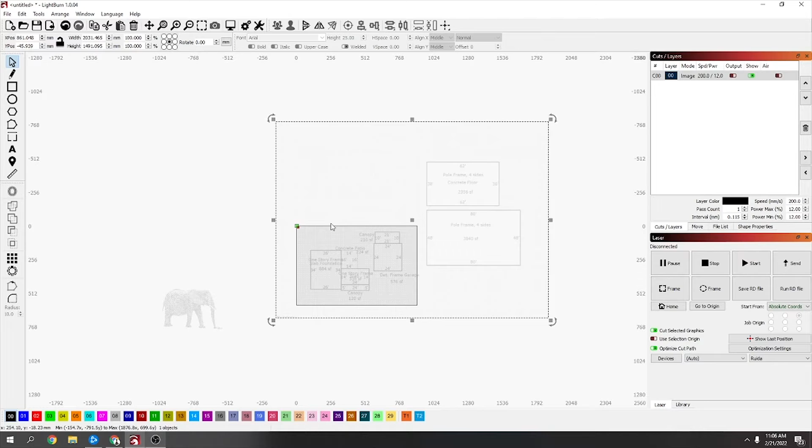First, what I did was go to the auditor's website, and they had a sketch on there of the property which had the sizes and everything, so I could just go straight off of that.

First thing I'm gonna do is, this is 26 feet, I've got to pick my scale for what I want it to be. I went with a 1/24th scale, and if you find a scale converter like this one, just type in the real length and it'll tell you the scale length there is 13 inches.

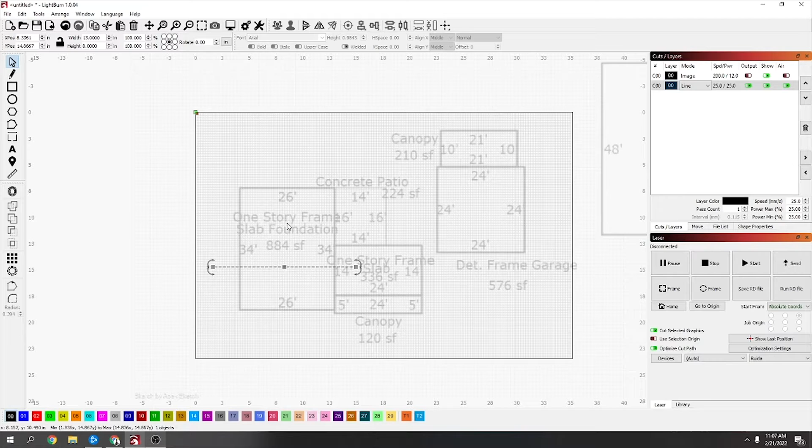I'll go back there, draw out a line, hold shift while you do it so it draws straight, right click so it disconnects, and then up the top go to the selection tool and select it. Up the top, make it 13 inches, so you know that's the scale for the 1/24. So now this 26 feet needs to be that wide to be in the correct scale.

So I'm just going to grab this picture, scale it up until that fits within the walls there. Yeah, that looks pretty close there, so I'm going to leave that at that.

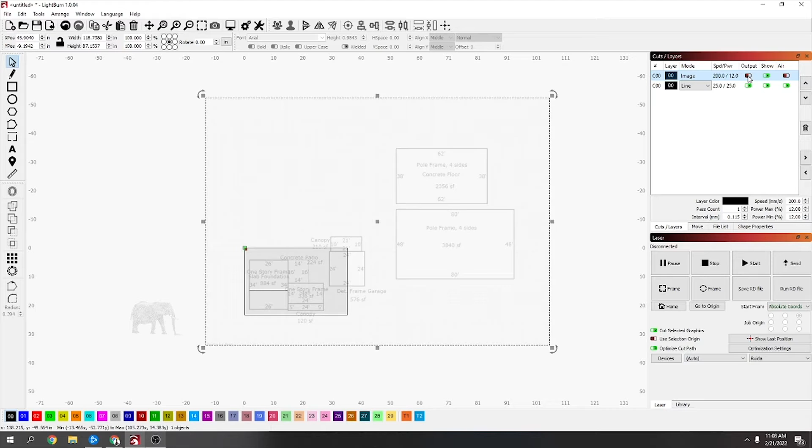You can, with this output, turn off output and it will still give you an outline, but it won't block everything. Sometimes it's hard to see. Alright, so we don't need that line anymore because you've got the scale now.

All you've got to do really now is follow around. The only place, because what I'm going to do is I'm going to make slots for it to stand up in.

So what I'll do is draw a square here. I'm going to draw one here, because this other part is a canopy, so I'm just going to do it to here for a second. I'm going to connect these two together just by shift and click, so now they're both connected, and then down here take everything out of the centre, so now we've got that shape.

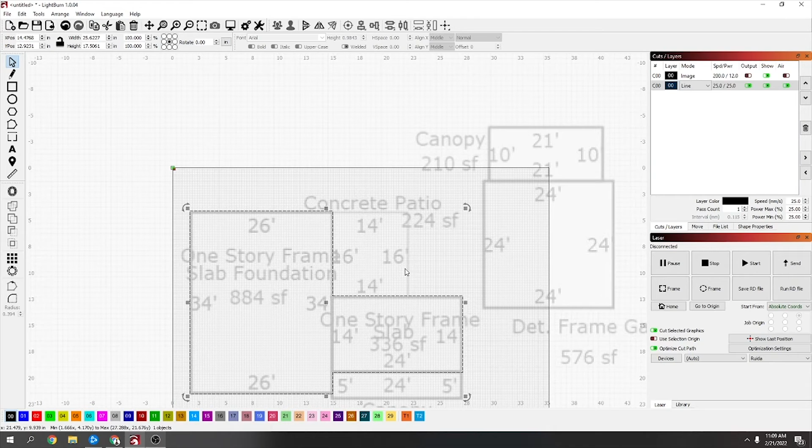This is a concrete slab, and this is actually in the wrong place, but I think I'll just stick with the actual house. So now you've got this line.

The foam I'm using, the foam core, is around 3mm thick, so what I'm going to do is put an offset. Oh, I've got to change that to millimeters first. I'm not sure what that is in inches, so in millimeters offset I'm going to change it to 3mm. It could be 4 actually, because that was already on there. I'll leave it at 4.

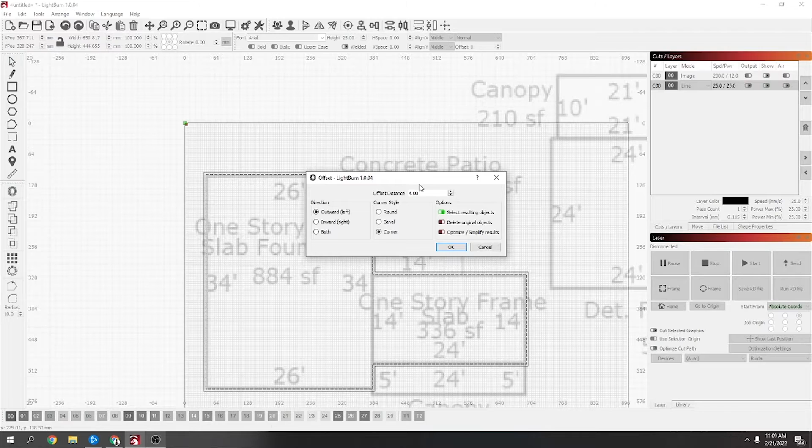I could always scale it down a little bit. So now we've got all this would be cut out. I don't quite want that. I've got to put where my doors are, and it's not actually on this map.

I know roughly, there's two 6-foot patio doors here, so this is going to be 3 inches in that scale. So I'll go back to inches, make the width 3 inches, and really it just wants to be a bit wider. There may be an easier way of doing this, but this was the way that I've found.

Now if you come to this node tool and click on these lines and just press T, it will cut it back, so that's the opening for the 6-foot door. So now I could take this, flip it 90 degrees. I've got to close them ends off as well afterwards, and the other patio door is around here.

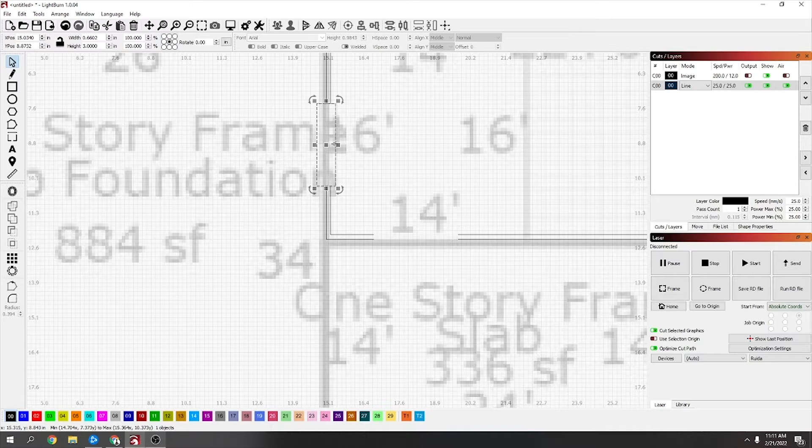So I'm just going to do the same again, node editing tool, T, click that one, T, delete that for a second, and now just with this pen tool I'm going to draw in these ends, just connect them again.

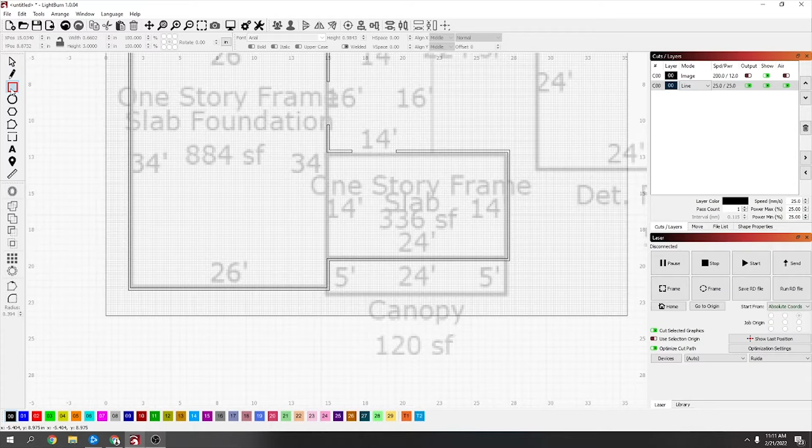Okay, the front door, which is 36 inches. So you can just change this to inches, change this to 36, and that will tell you that would be 1.5 inches. So just draw out another square, make it 1.5 inches.

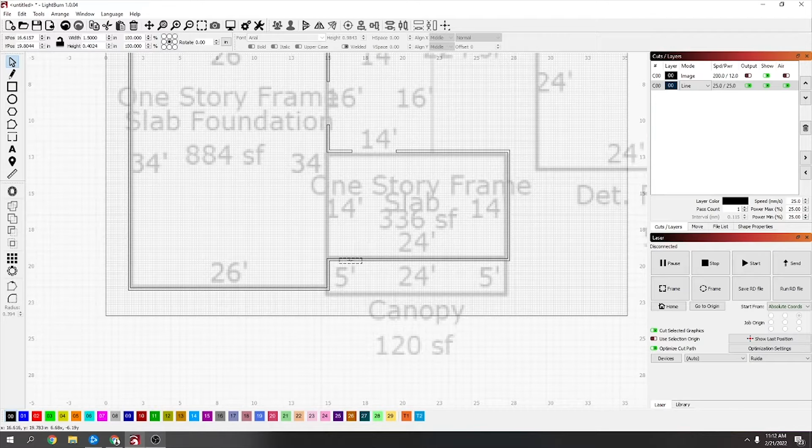And where the front door's going, for me, is around about here. Just do the same thing, cut it out, and basically that's the idea, just go around and cut out your doorways.

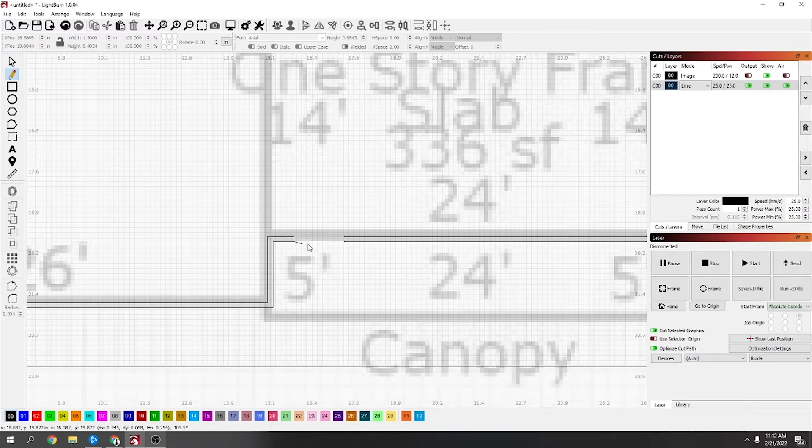You don't want the big chunks to fall out, so really you want some kind of doorway or something so it doesn't just completely break off, because the windows are going to be cut within the wall, so these openings are only where doors are going to be. But I think that's all the doors on mine. I do actually, this building is connected here, but I'm going to leave that one out for now.

Okay, so the next thing is to know the height of the ceiling, because that's how tall your walls are going to be. For me, that's 8 feet. So let me just quickly put this back to inches, which would be 4 inches.

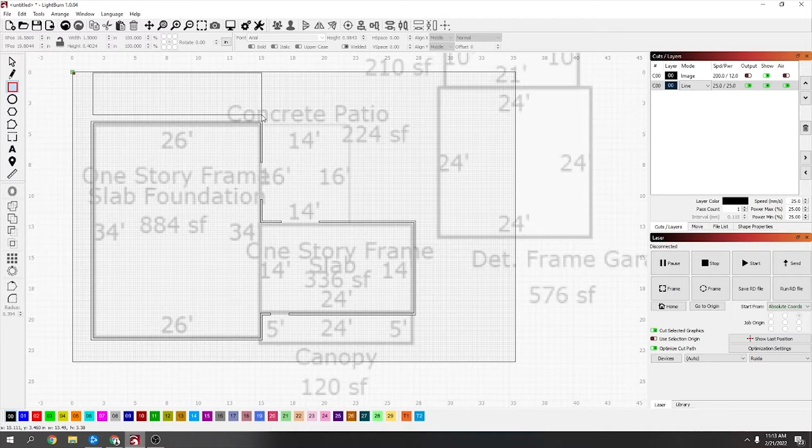So back to the LightBurn. Let me just go back. I'm going to start right, it should start the box from this corner.

Okay, so that one should be 4 inches tall. Oh, but it's slotting into the bottom, so actually it's got to be a little bit extra. In millimeters, if I add the thickness of that, which is 4 millimeters, so I'll say plus 4.

So now it's added 4 more millimeters to that, which is 105. What is that in inches? 4.1575. But now, actually, now we've got one wall, you can just duplicate this really and flip it around.

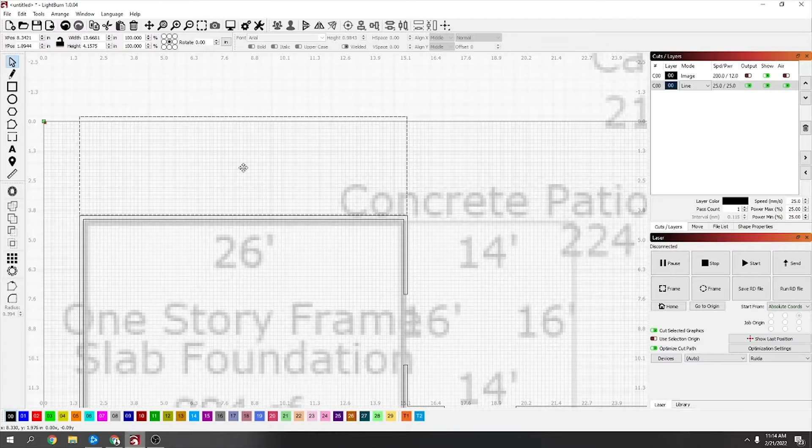That end's correct, let's just make sure this end's pretty close. Okay, so that's that wall done. So now Control and D, that will duplicate it, flip it 90. Up the top there, just type in rotate 90. Now it lines up nice with this wall.

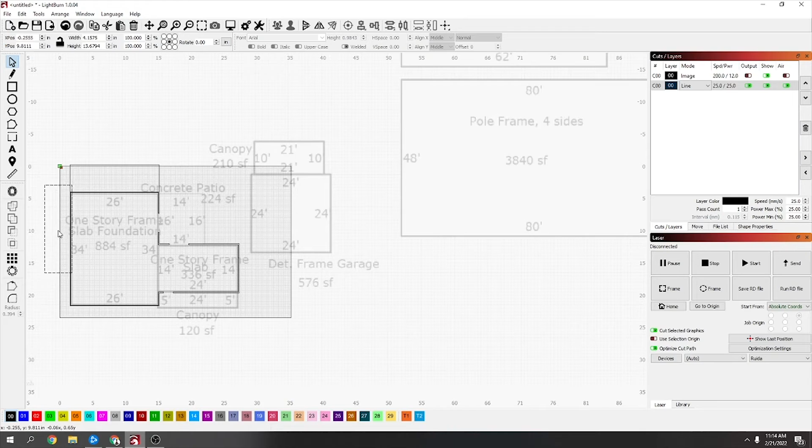We know this one comes right from that end to that end, so this one here has actually got to start from this side of the corner here, because that one's coming all the way through, and then it's going to come down to here, and then I'll make sure the one at the bottom comes right through.

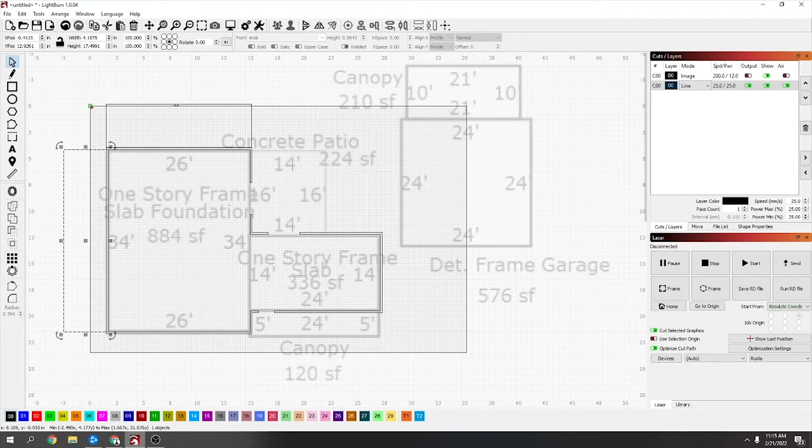Which I should be able to duplicate this. Hold shift, drag it straight down. Yeah, and that lines up in there. So now you can see that one is a little bit shorter than the others, because it's not going to, these are coming right to the corners, that one's not.

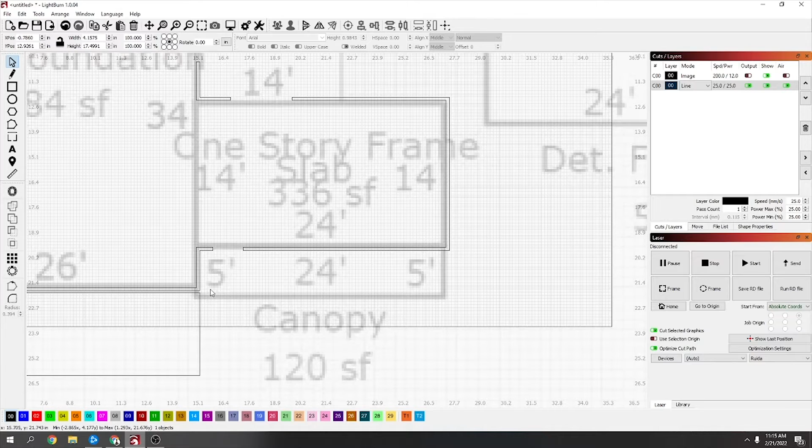Okay, I'm going to duplicate this one because it's the right rotation. Just line this up, and basically just, I'm going to skip through this a bit, but that's all I'm going to do. I'm going to go around and line all these up, and then I'll come back.

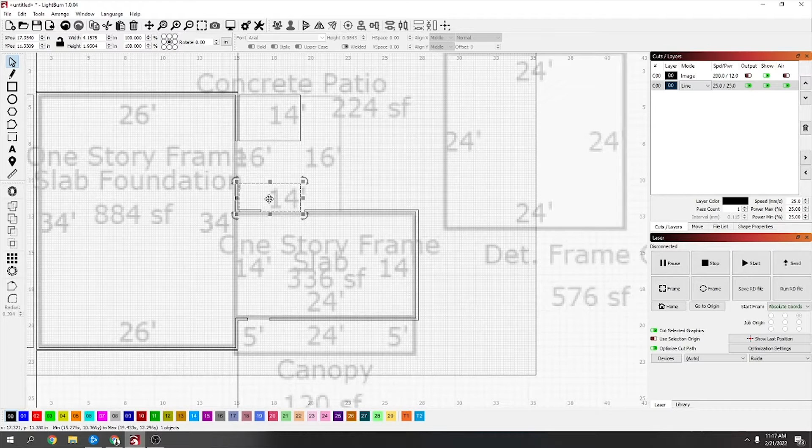Okay, one thing I forgot, around here where the doors and stuff are, you do want to go right over the top, really, so I shouldn't have done how I did there, so I'm going to just get rid of this one and just show you with the doors. This has still got to be dragged all the way through. I'm going to come right to this end.

I mean, that looks about correct for the distance from the ceiling to me, which is, well, that's 6 foot. It's got to be a little bit taller. Maybe I'll go to there. But you could go measure it with the scale converter.

And then with this one, yep, just make sure you dragged your box past. As long as you're only moving the bottom of this box, it's not going to affect the top of the box. So as long as that top is in the right place, just pull the bottom past, control and click so you've got them both.

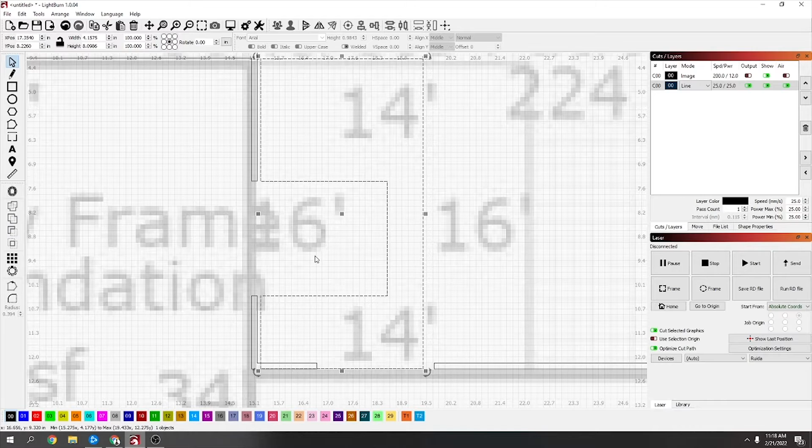And take everything out of the outside. And now you can see it's left the opening for the doorway there. So I'm just going to move that out of the way a little bit because I've got to do the same here.

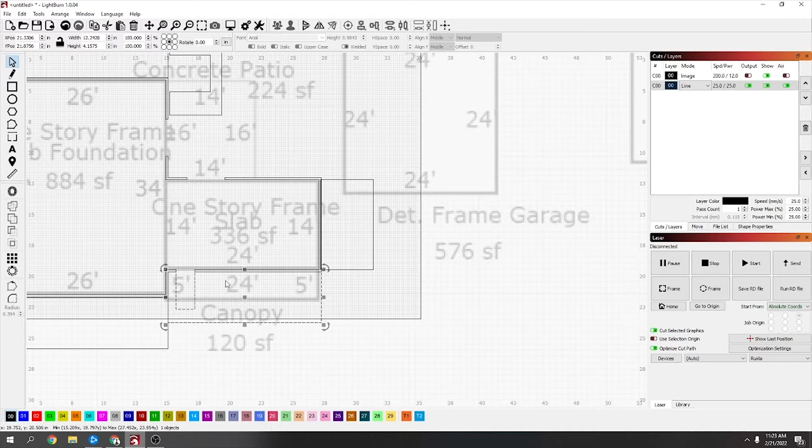Okay, that's all the doors cut out. Now it's just a matter of working out like the size of the windows and where they are. So yeah, just got to, you know, take your measurements and do it more roughly.

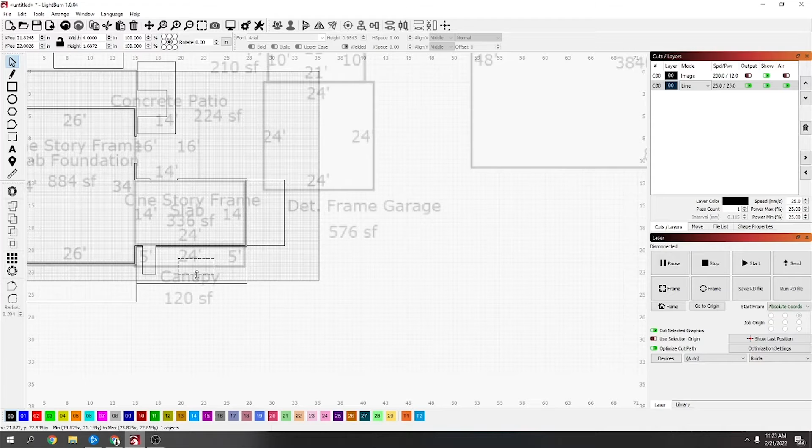I know my front window out there is about 8, so that'll be about 4 feet in, and it's about 3 feet tall, so 1.5, 1.5. Maybe it's a little bit taller than that.

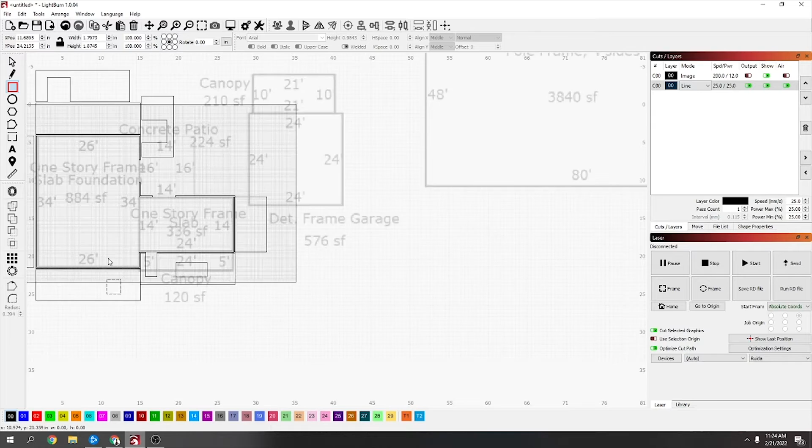I'm going with that. Then bedroom, just 2 smaller windows. I mean, to measure these up correctly, if you wanted to, if it was 3 feet off the ground, you could just make 1.5 inches square here.

So just make it 1.5 by 1.5. And now, as long as that's lined up with the bottom, let's just move it out a little bit so you can see what's going on.

So that would be my wall. This one would have to line up with the bottom of the wall. So that would give me that. This, I believe, is actually about 3 foot tall, so the height. I'm going to move it down to that because it's about 3 feet off the floor.

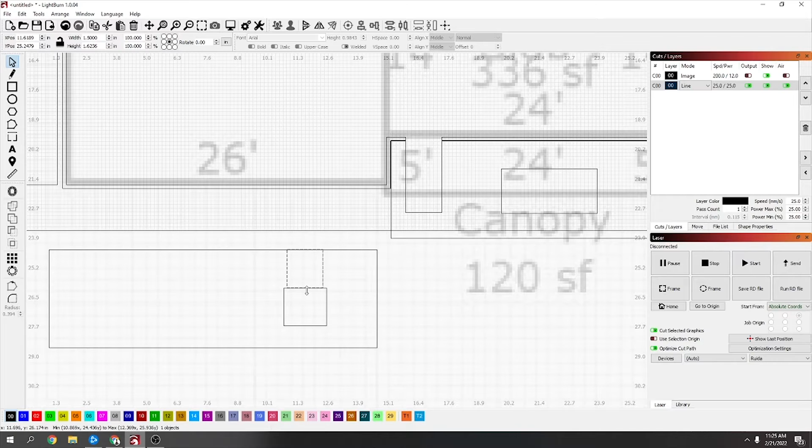Oh, I forgot, I've got to allow for that 4mm thickness, so drag this one across to where the other window is. Duplicate this one, drag that across.

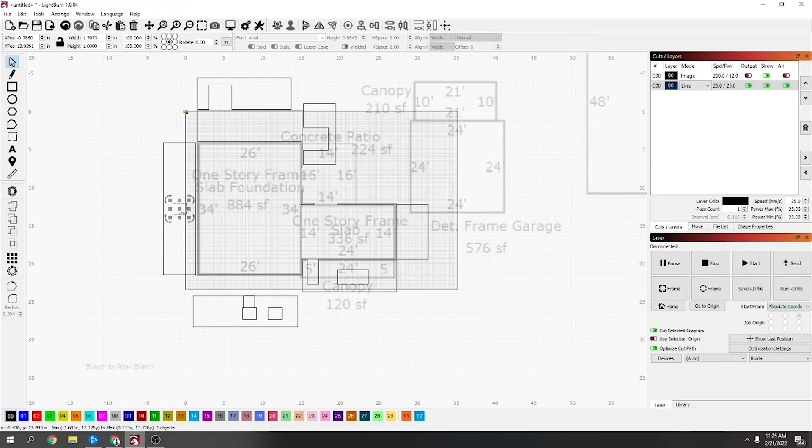And then same thing, I'm just going to go around and put my windows in, so I'm going to skip through this. Okay, so that's all the walls done.

So all I'm going to do is, oh, like that. I'm going to turn that off for 1 second so I can select these without no problems. I'm just going to group these walls together, so group this wall.

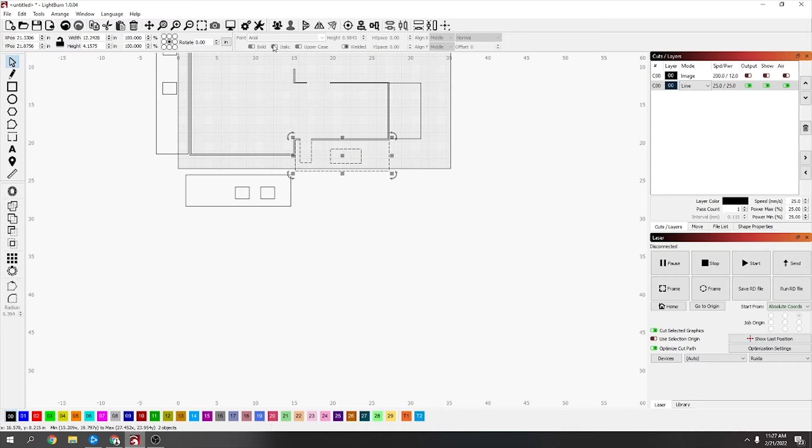And now it would be the interior walls next, but it would basically be the same thing. I haven't got a good plan of where the stuff is, I've only got this plan that they had. So I could roughly guess it, or I know I've got a wall that goes through the centre here.

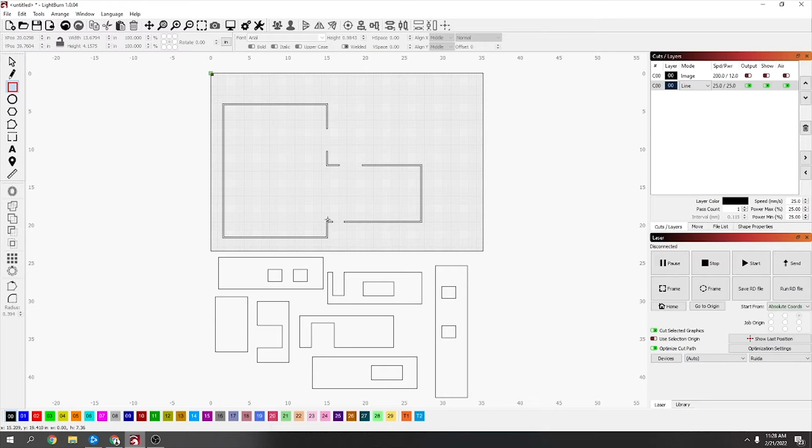I'll make that 4mm wide as well, like the other one. Make sure they're lined up. Yeah, because these actually don't need to be slotted in, these could just be glued right in after. So what I'm going to do is make this 4 inches tall. So this one doesn't need the extra length because it's just going... height 4 inches. Oh no, width 4 inches.

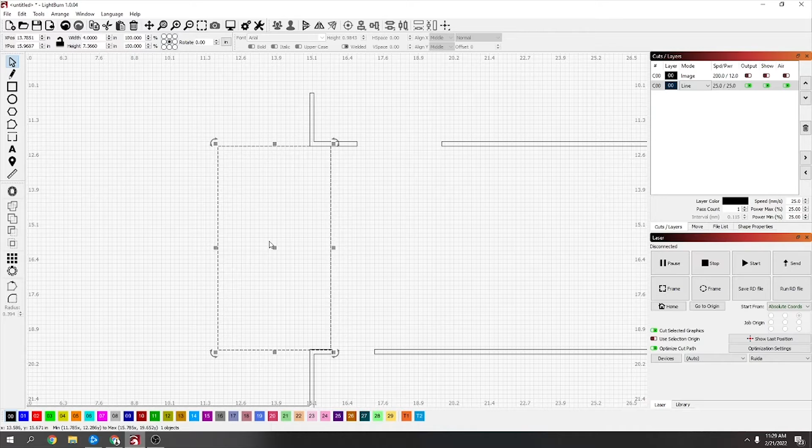So this would fit in between here and here, and in this I have a doorway. So I'm going to put that in where it would be. I know the door's just over 6 foot, so...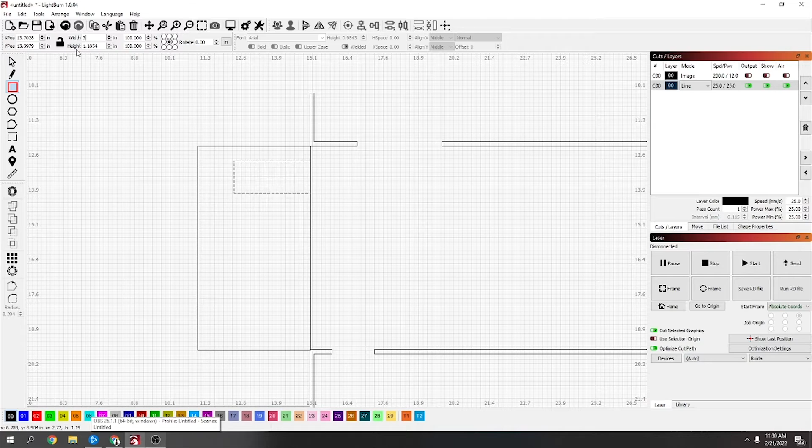Quickly see on a scale converter, I'll put it to inches. I think it might be about 82, so 3.41. And then the width will be 1.5.

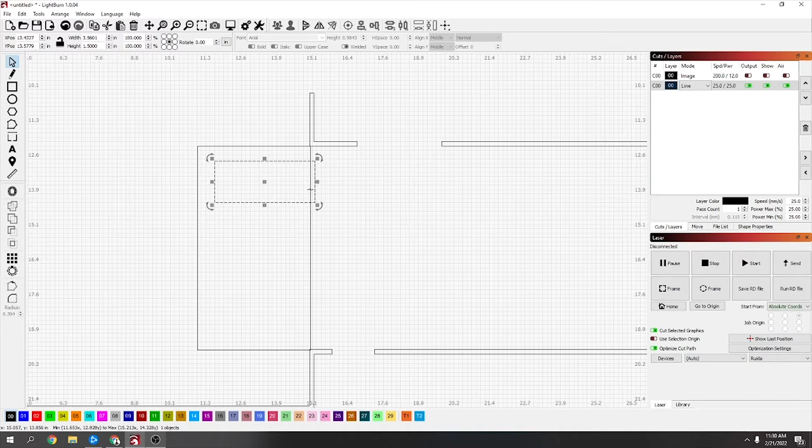That's actually a little bit further away, about there. So then I think you have to click the wall first and then the door, and then say everything on the outside. Now you can see it's giving me that, so that's an interior wall.

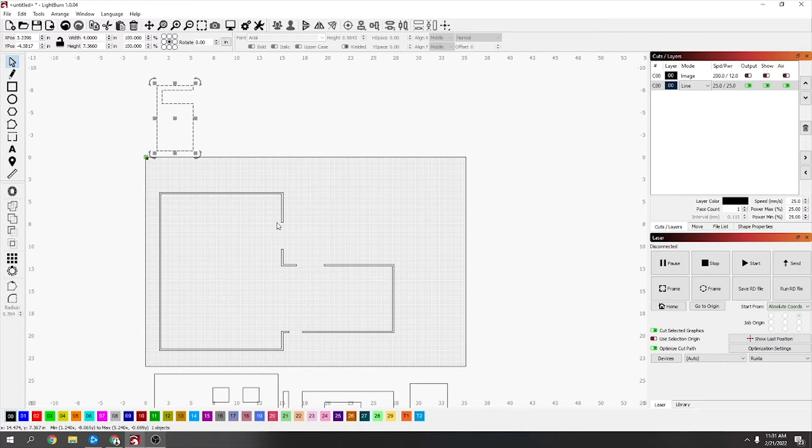Maybe I'll put these up the top so they don't get confused, but yeah, same thing, you just go through and make your interior walls like that. So I'm going to skip through this and I'll come back after I've got it done.

Okay, I'm going to make this wall go right the way across and cut the doorway out of it roughly where it would be. So I could actually just follow this doorway now because they're the same size.

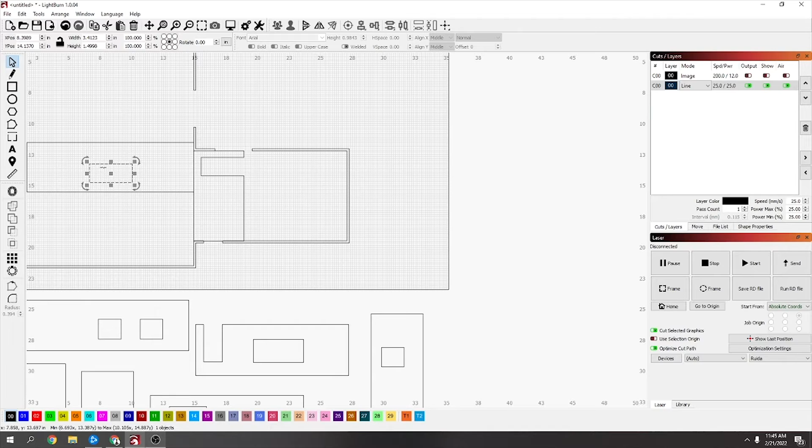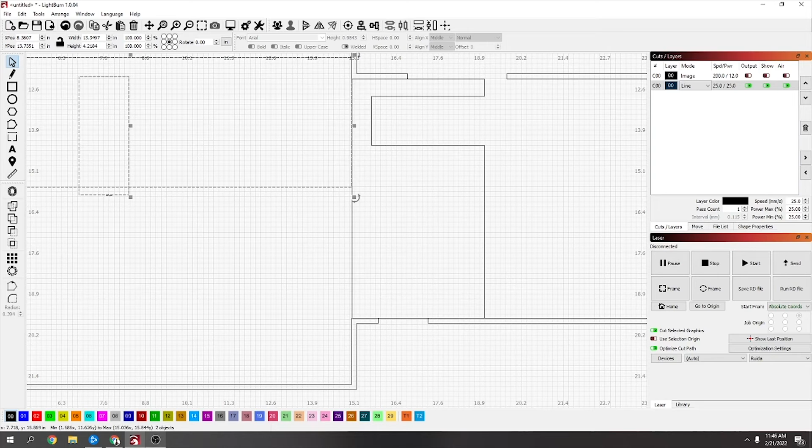You can just drag out a box right inside there and then flip it 90. Put it where it's going and then get the bottom line to line up. And once you do, just pull this past a bit, select the big shape first and the little one, and everything on the outside.

That's it, so that's the doorway there, which would be into the bedroom this side. And now all you want to do is really line this up where this wall's going to go, like mine goes right at the side of this door basically.

Or actually a little bit further back because there is a staircase there. So I'm going to just go there. And really this would be, if you was measuring the room, now you'd be measuring from this line. So I'm going to just drag out a square there.

So I've got another wall up the top there, which now this area is the kitchen. So this only wants to be 4 inches tall, same as the other walls. Match that up, make sure, yeah. However long it is, so I'm going to go 7.5.

I think it's about 13 or 15 foot maybe that wall. And then I'm going to line this top line up with where that wall would be, which is around there. And then this wall that comes through this way, 4 inches, this time it's going to be wide.

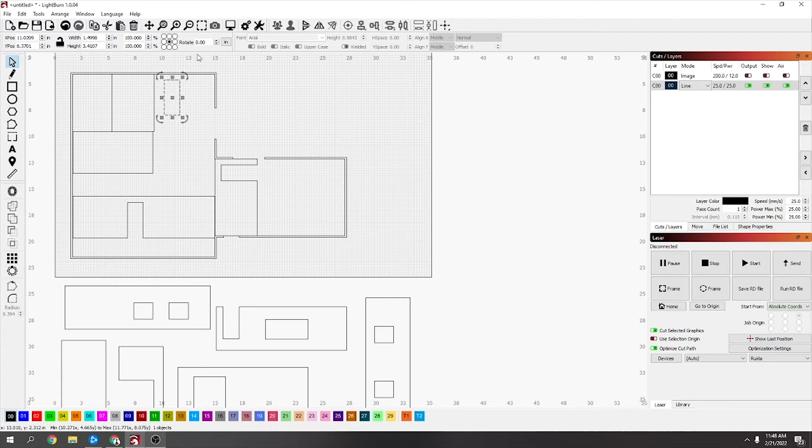And then this one's got a doorway in it as well, so I'm going to draw another doorway out. Select it, move it up here. I probably should have picked the other one because it was already in the right rotation, but I'll rotate it 90, line the bottom lines up, drag it past a little bit, select the big shape, select the little shape, everything out the outside.

Okay, so now that's that wall, and actually that's about it. From what I can think at the moment, I could always cut a couple little pieces afterwards.

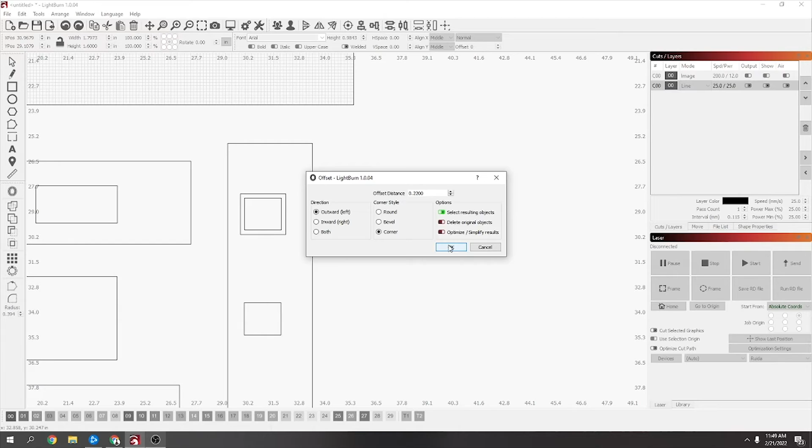Another thing you can do is around these windows, if you want, you could draw a square, offset it outwards, just enough for a little frame. Select the resulting object, yep, okay, then I'll just select that as well. So now you've got little frames that will go around these windows.

So it's just a matter of duplicating how many of them you want. So I've got 2 there for that, 2 more over there I see. So just check they fit. Yep, 1, 2.

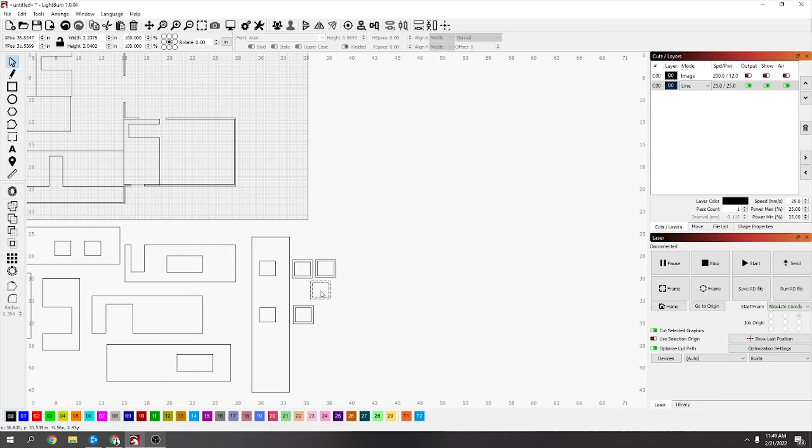There's the frames. You could do the same with the doors and stuff as well if you wanted, but I think I'm going to leave it at that for now. These other pieces, which is the interior, I'm going to put up the top just to keep them separated from

the exterior pieces. One last thing I did was I changed these onto different colours, so I know this is the interior walls, like the green's the interior, red is the exterior, and then this is my original sheet. So yeah, I just wanted to show that just so they don't get mixed up. It'll be a bit easier to put it together at the end.

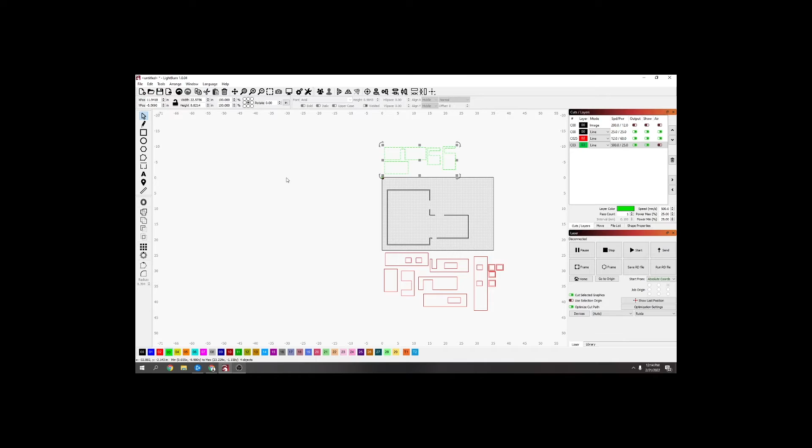Okay, one other quick thing I just wanted to add here. So I was thinking when I do cut this out of the original sheet, this whole part here is pretty much going to want to just fall out because there's nothing holding any of this, because I'm cutting all that out because I ain't got no doors around this side.

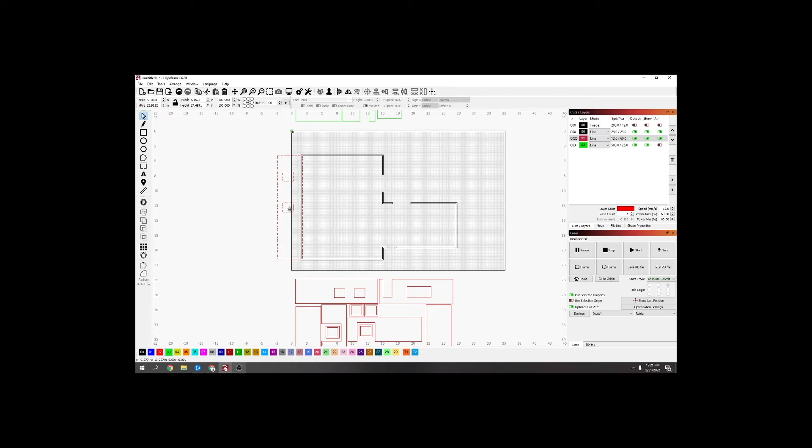So to get over that, what I'm going to do is line this up, the wall that's going along this longest side, and we're already deep enough to slot it in there, so I actually got to cut a little piece out of this and then cut a piece out of that as well. So it was 4mm I added before, so I'm just going to change that to millimeters, make it 4mm wide. I'm going to put it on the red layer just because that wall's on the red layer.

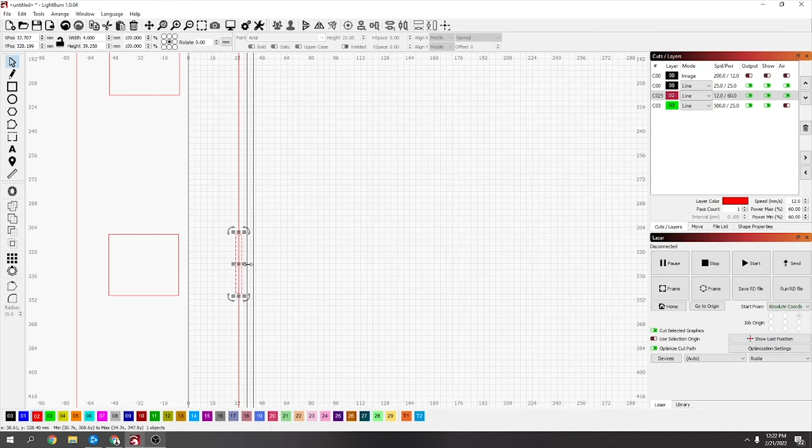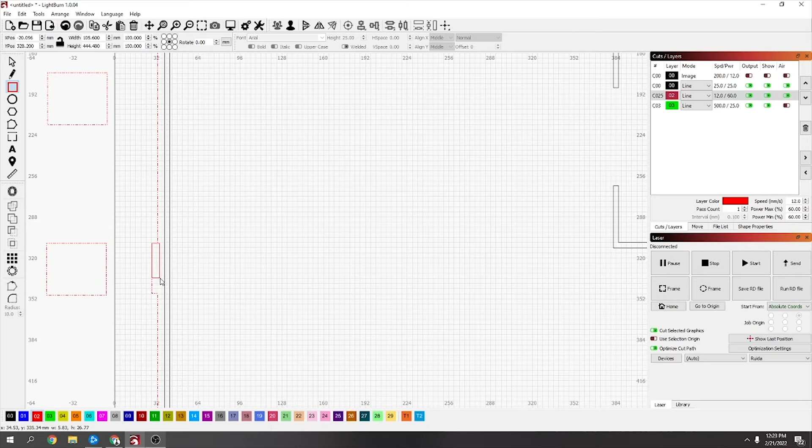So now, right in the middle, we've got this little piece, so I can draw another square there where we just cut that out, drag this over. I'm going to make it a bit wider, making sure not to change the length of it. And then on the node editing tool, click these black lines, press T, this one, T. So now we've got the right slot there, so I'm going to delete this square and then just close off these ends.

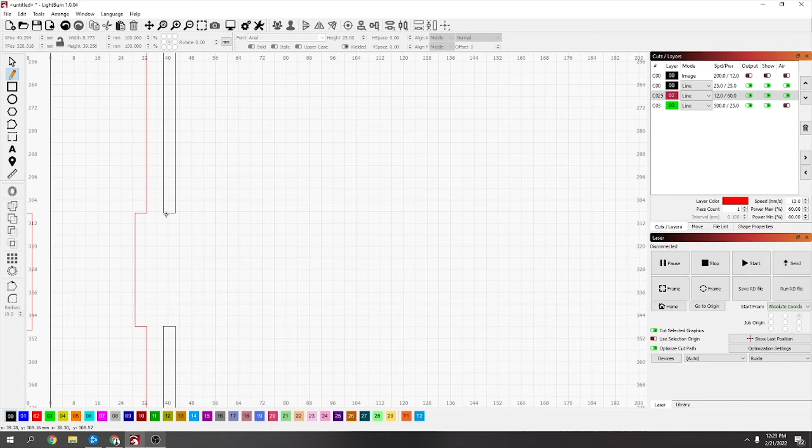So just on the pen tool, I'll put it on the same layer. That's that one, that's that one. So now this should slot either side of this, and then when I cut this out it's got a bit more support. Yeah, so I just wanted to show that. I could do the same on the front and back wall really, but I think that'll be ample because I'll be gluing it, so yeah, just wanted to show that. Okay, now out to the laser.

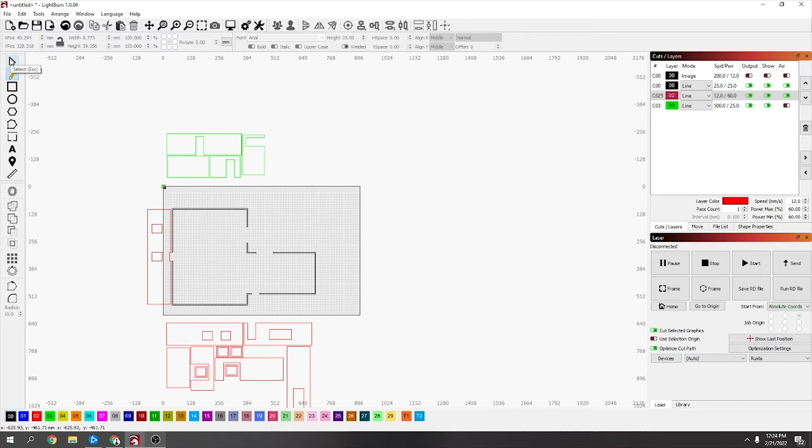Okay, I'm outside now. I made a bit of a mistake indoors, but only because I had the wrong size material. I thought it was 4mm, but actually after looking in my book it needs to be 4.725, so I was just going to quickly show how I'm going to change that, even though this should have been done at the start, but whatever, mistake was made, so I've got to fix it. This is how I would do it.

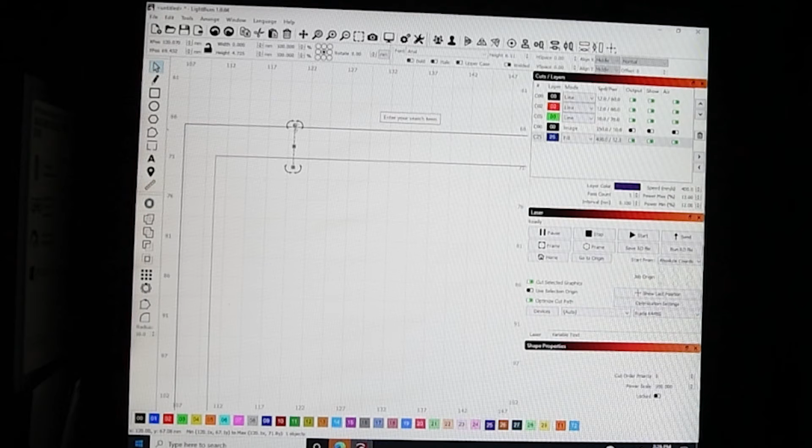Draw a straight line from one of the edges like this, and then these lines, because the way we drew them out, are already broken up. You don't want to move the outside because these are the correct sizes, so that's going to start causing problems. So what I've suggested is selecting these lines like this and then just moving it down and moving these ones in and then cutting off the extras. It's definitely a bit of messing about that you shouldn't be doing, but really what I'm going to have to do here is just press B on this corner to break it.

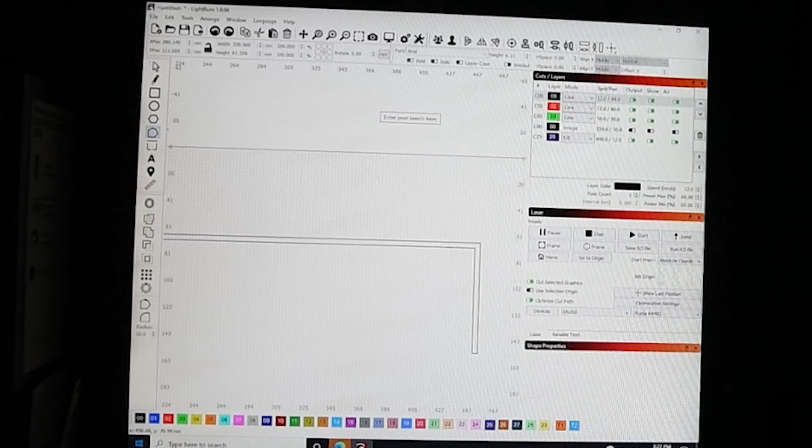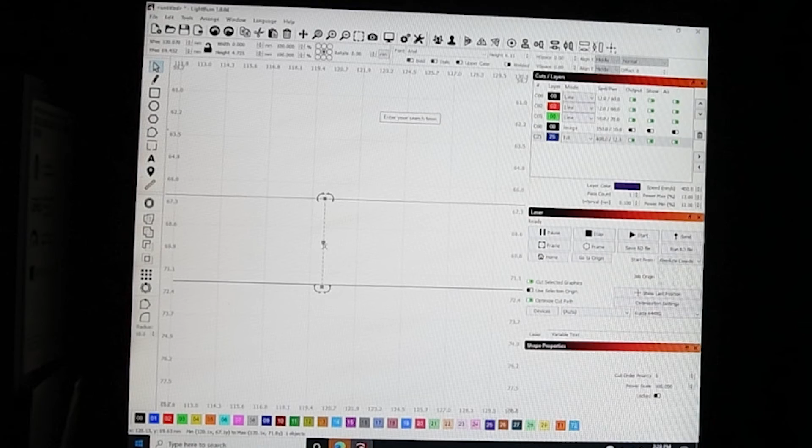So now I've just got this one edge, and then I'm just going to grab that and move it down to the bottom of that line, and just make sure you hold shift as you do it so that it don't go off track. But really you don't want to be doing this. So I'm just going to get that done and then I'll switch it back on. But yeah, you just want to line it up kind of like that. You can see there's a little tiny gap there. And if you move this line, just make sure you move it by the centre.

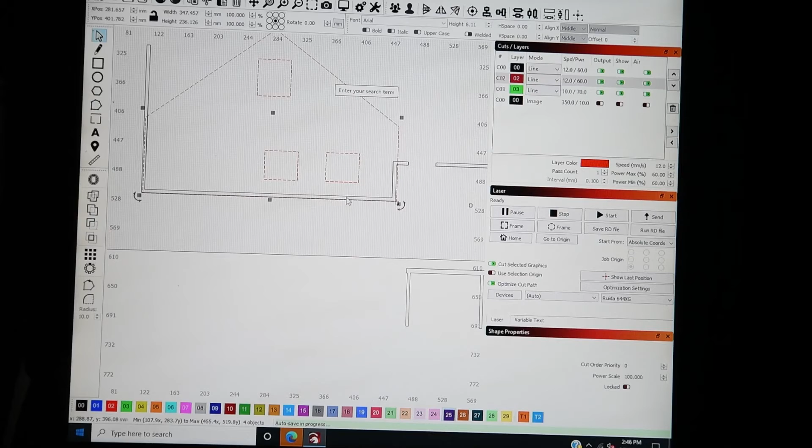Okay, finally I got that done. But yeah, definitely check your material first. I thought for some reason it was 4mm, but anyway, I've done it now just to check that it was right. I put that front back on there. All I did was make sure I only mess around with the inside lines so that the outside was still the same. But yeah, it's still messing about, unnecessary, so definitely get that right.

Okay, so starting from here, I'm going to cut this. According to my book, it says last time I used a 50 speed and a 20 power, and I guess that done it. So what I'm going to do is I'm going to do a 50 speed and a 25 power just to make sure that it goes through nice.

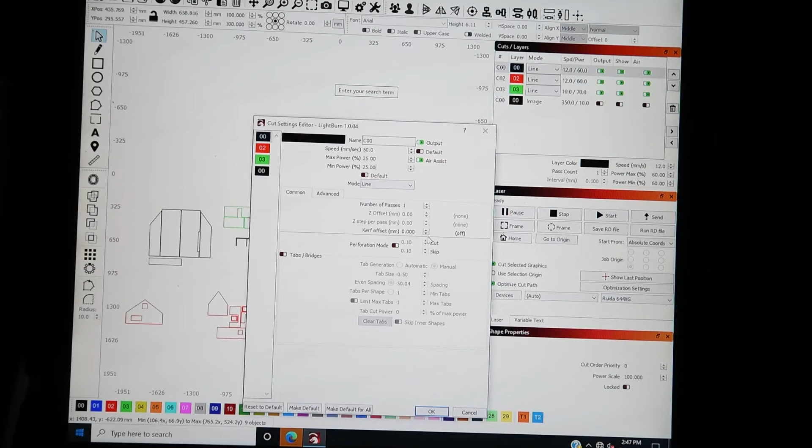So you can see if I right click, it's going to show me what's on this layer. I've got cut selected graphics on, so it's only going to cut what I've got selected. So I'm just selecting that. 50 speed. 25 power. Maximum and minimum. I'll leave air assist on because I'm cutting. It's on a line. Everything else is correct. I ain't missing nothing. Okay.

I'm going to quickly just change all these so that I don't forget. Okay, sheet's in there. I lowered the bed down. This was the stuff I was using. It's just called Ross foam board. You get it from Walmart for about 80 cents a sheet.

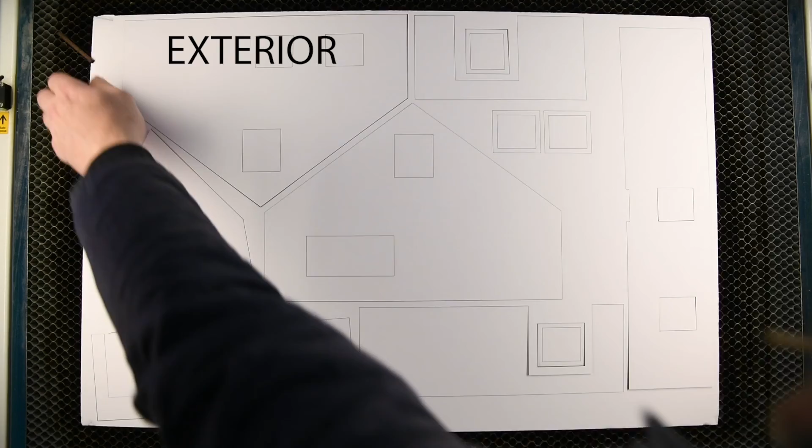First layout. So now I'm just going to drag the next lot, what will fit in there, and send that. So that'll be the next thing. That's most of the interior. Now I've just got to do the exterior and the roof. That's that last bit done. So now I'm going to take that in and see how it glues together.

Right, first things first, make sure you got the wall around the right way. So this would be my front door. So let me get the front door and the window. I was supposed to have one roof go on the top this way, and then the other roof comes like this, at an angle this way, but it's just not quite long enough.

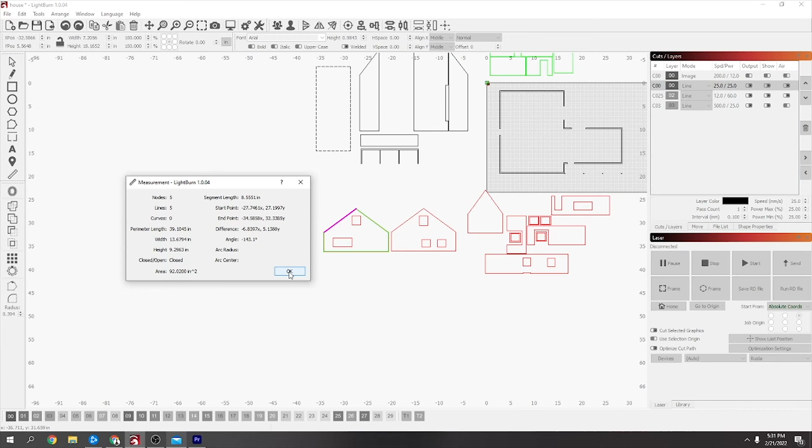Okay, earlier when I done the roof, I made a mistake. For some reason, I put the roof over here and measured it like half here and half here, which was way too short. What I should have done was, if you go to this ruler tool and then go over where these roof sections are, you can see it's 8.5551. So that actually needs to be the correct length to overhang a little bit, but then the width of it, if you want it overhanging a little bit, you're going to have to just do a little bit extra. Maybe 8.7. I'll see how that looks.

So I'm going to change this, because the length was correct, and you can tell the length by putting it over here. You can see I've just got a little bit of overhang either side. It's just the width. So the width is 8.5551. And then, yes, make it bigger. So that's the correct width at the moment. So if I say plus, up there in the top, if you put +4, in inches, it'll be better in millimetres really. I'm going to change this to millimetres and then just say +5 millimetres. So that'll make it an extra 5 millimetres wide.

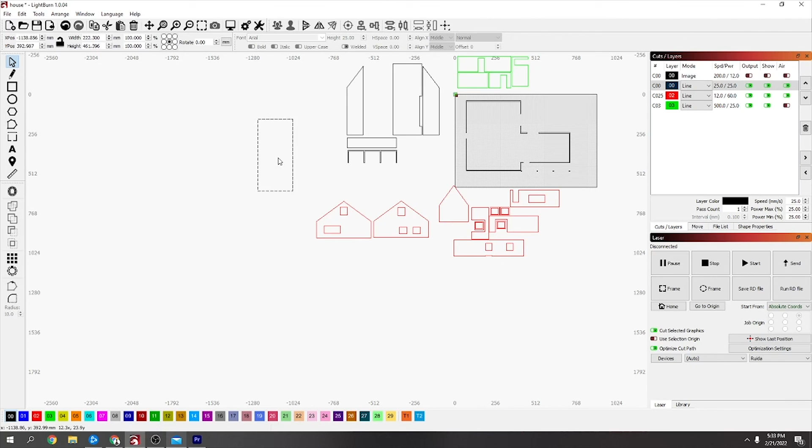And then to check it, if you did want to check it, you can always press Control and Z and go back. Yeah, I think once that top's up there, you can see it's got a bit of overhang. And now I believe that would be correct. And I've got to do the same with the other roof as well. So I'm going to go back, just so it's back square again.

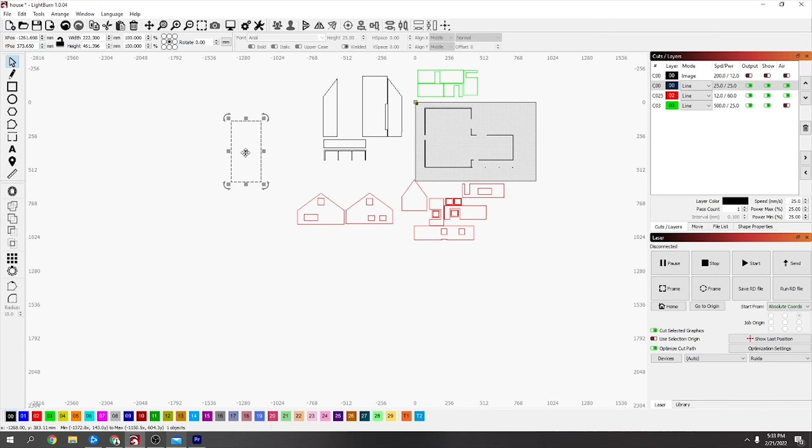I'm going to duplicate that because the other side is the same. The only difference is on the other side, the little bit that it's overhanging there, I've got these walls which are going to be a bit in the way, so I'm going to have to make a little thing there like I did on this one. Let me see. Let's put this one over there a minute. Yeah, so I'm just going to line that one up with that one and move it into how the other one was, because that seemed about right.

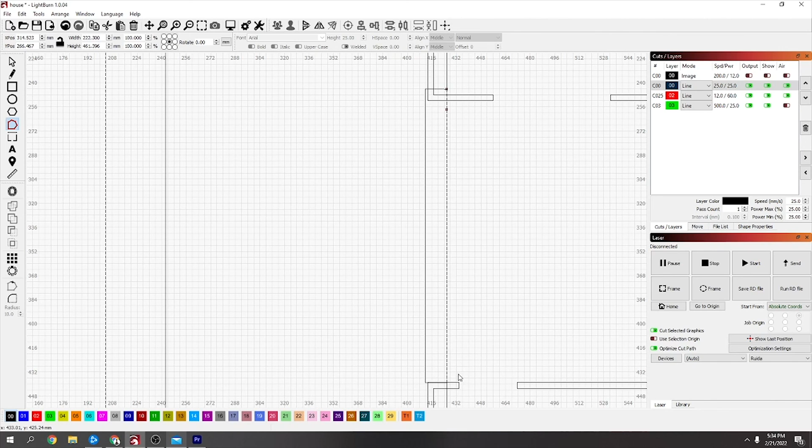So to do that, I'm going to have to convert it to a path, go to the node editing tool, and then insert a node right on the end, insert another one there, insert one on this end, and one here, and then just drag these two to the corners.